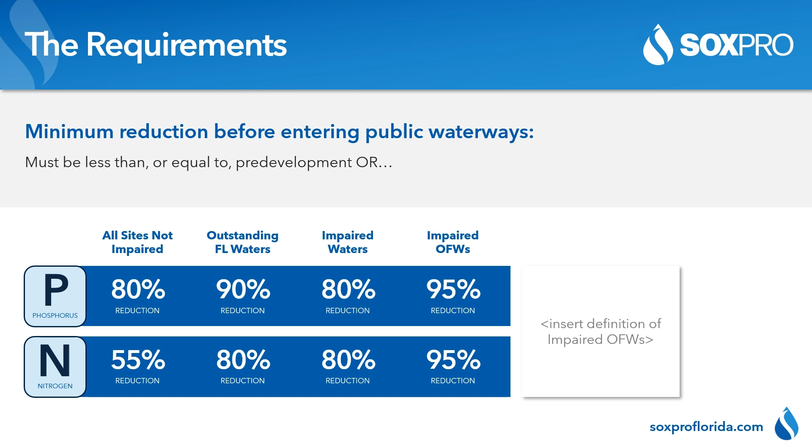The impact: the new rule forces all audiences to recognize environmental responsibility. For elected officials, while the new BMPs and bipartisan bill approval offer significant benefits, constituents may be unhappy about costs. Officials will need to balance environmental concerns with economic development.

Agency officials must ensure enforceability and compliance with requirements, develop remedy guidance for noncompliance, and effectively manage resources while addressing technical challenges.

Engineers must educate staff on new rules, develop multiple engineered choices and systems, and communicate plans to clients and permitting authorities.

Builders must collaborate with engineers on cost-effective solutions, assess and adjust practices and design standards, and address fines for non-compliance and permit issues.

A proactive partnership between erosion control and water quality. SOX Erosion Solutions develops, manufactures, and distributes a suite of environmentally focused, innovative, patented, bioengineered erosion control systems that immediately halt shoreline and hillside erosion.

Welcome to SOX Erosion Solutions, where we revolutionize environmental stewardship. At SOX, our mission is to stabilize, reduce contaminants, improve water quality, and expand green spaces. We deliver innovative and environmentally responsible solutions to counteract soil erosion.

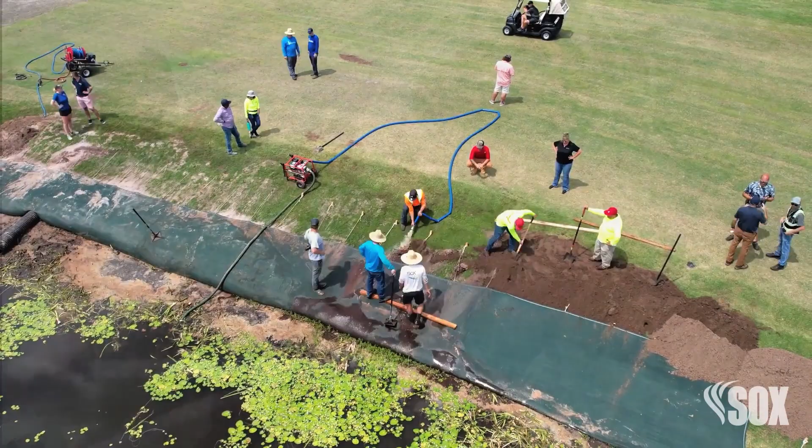Our team is dedicated to providing durable, high-value outcomes for our partners, stakeholders, and communities. We strike the perfect balance between economic growth and environmental preservation.

We work with a diverse range of clients, from local governments to private landowners, ensuring that our solutions meet the unique needs of each project.

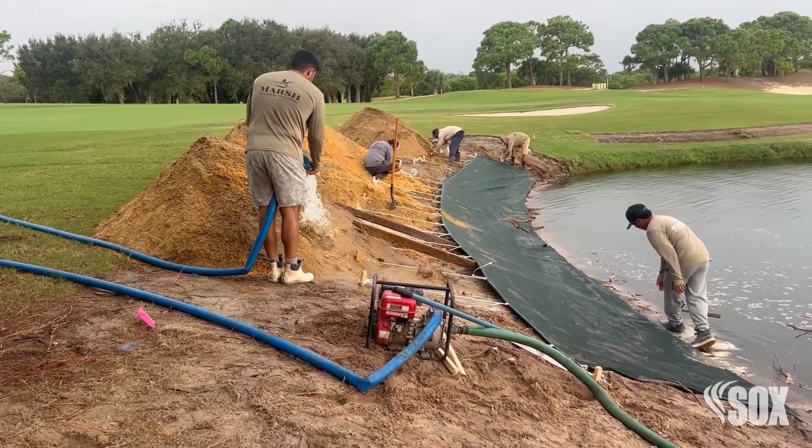SOX develops, manufactures, and distributes patented bioengineered erosion control systems that contour to any terrain. The systems are filled using locally sourced material or by dredging sediment from the adjacent water body, providing immediate stability and enhanced vegetation. Join us in making a transformative and enduring impact on our communities.

Together, we can create a sustainable future. SOX Erosion Solutions, leading the way in environmental stewardship.

SePRO Corporation is an environmental restoration company dedicated to protecting, preserving, and restoring nature. They provide water diagnostics and restoration technologies because everyone deserves clean, safe, and enjoyable water.

Most people enjoy the water for what it is: a place to boat, fish, and swim. A place to relax. A penalty stroke. A valuable resource for irrigation.

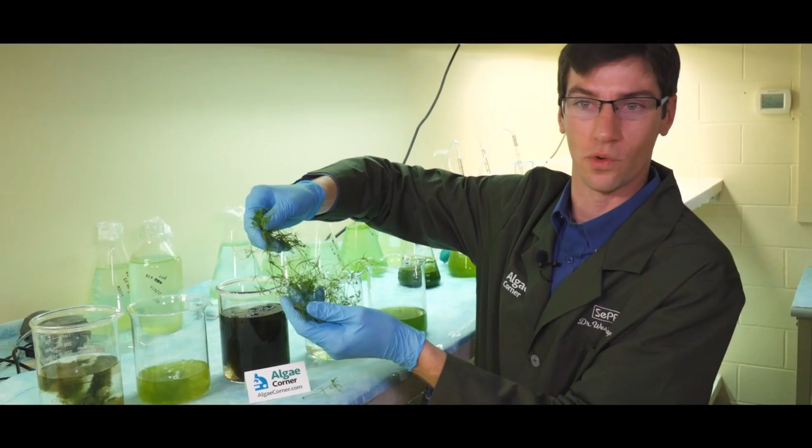But not all water is good water. As the aquatics industry leader, we embrace the most difficult challenges impacting water bodies today, developing solutions for the toughest, nastiest problems.

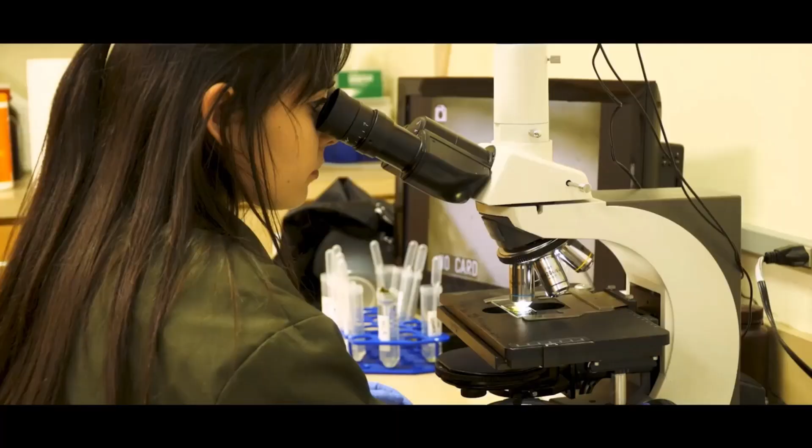Empowering professionals and homeowners to take charge, to restore natural beauty, and to prevent future issues. Through our research, we're finding new ways to fight the eyesores and health risks that plague water bodies around the world. And through our innovative technology, we're doing more with less.

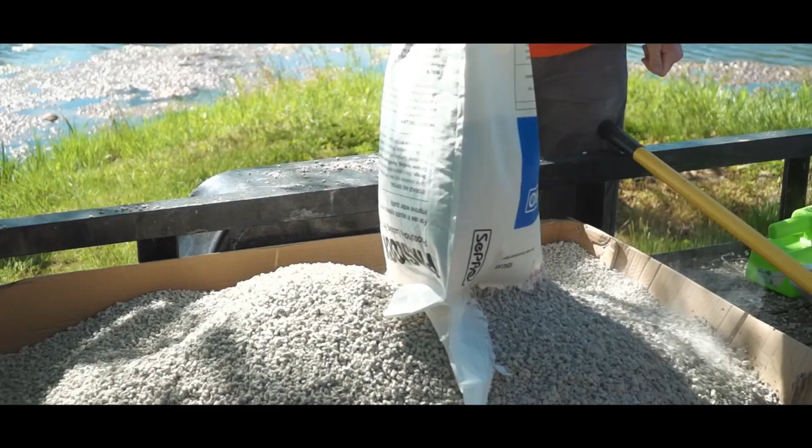We work to eliminate and prevent aquatic weeds that can be unsightly and hazardous, algae that can be toxic and noxious, and other water quality issues that can lead to future problems. At SePRO Corporation, we're committed to protecting, preserving, and restoring your water for the past 25 years and for generations to come.

SOX Erosion Solutions and SePRO Corporation have partnered to develop a new technology, SOXPRO, in anticipation of the new Florida Clean Waterways Act stormwater rule. SOXPRO is a 5-part system.

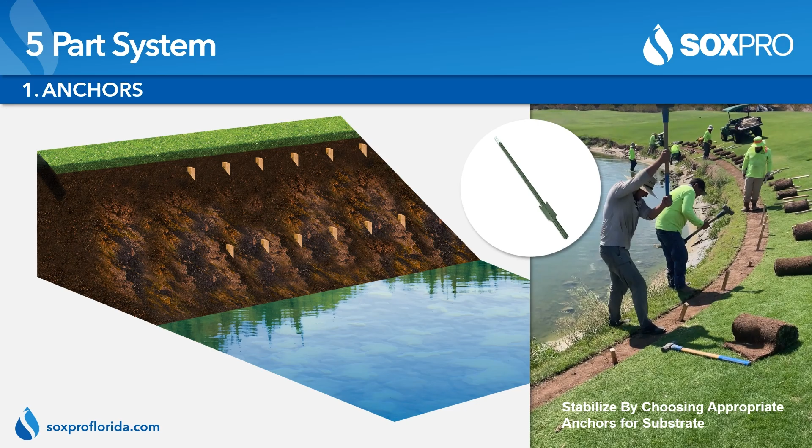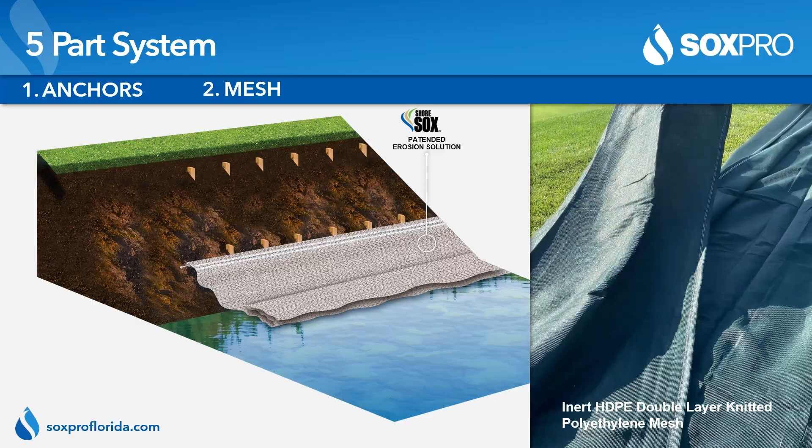Part 1: Anchors. Stabilize the system by choosing appropriate anchors for substrate. Part 2: Mesh. SOXPRO is manufactured with inert HDPE double-layered and knitted polyethylene mesh.

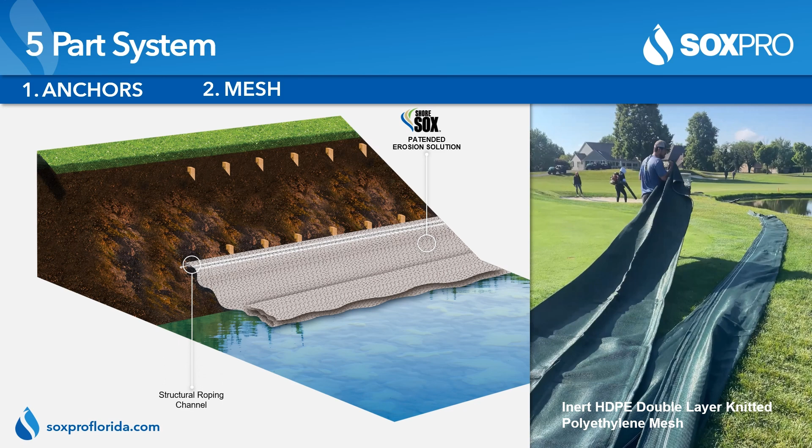The mesh is constructed with an integrated roping channel for structural support. Part 3: Tethering. SOXPRO is manufactured with inert HDPE double-layered and knitted polyethylene mesh. After the first row is secure, the mesh is folded for containment and then tethered to the top row.

Part 4: Fill. The system supports any organic fill material greater than 150 microns, such as crushed rock, coarse sand, mulch, compost, and dredge spoils. An active agent, scientifically formulated to bind phosphorus and nitrogen, is added to the fill material. The fill is compacted into the system by either washing it in or dredging it from the adjacent water body. Once filled, the system is immediately stabilized.

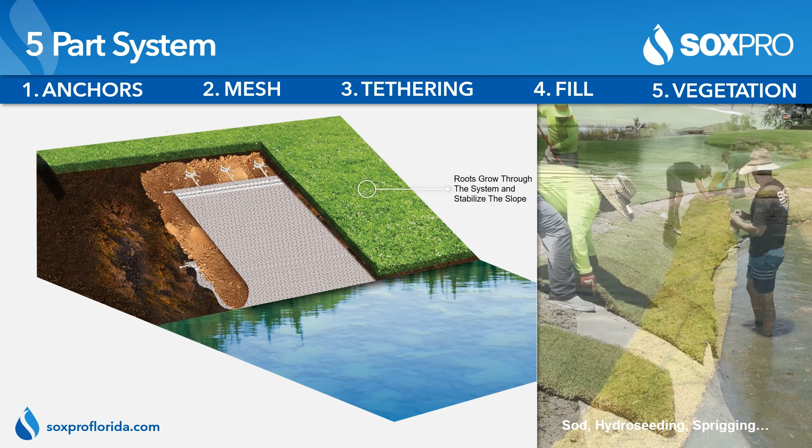Part 5: Vegetation. SOXPRO is vegetated with sod, hydroseeding, or sprigging. Roots grow directly through the mesh, further stabilizing the system.

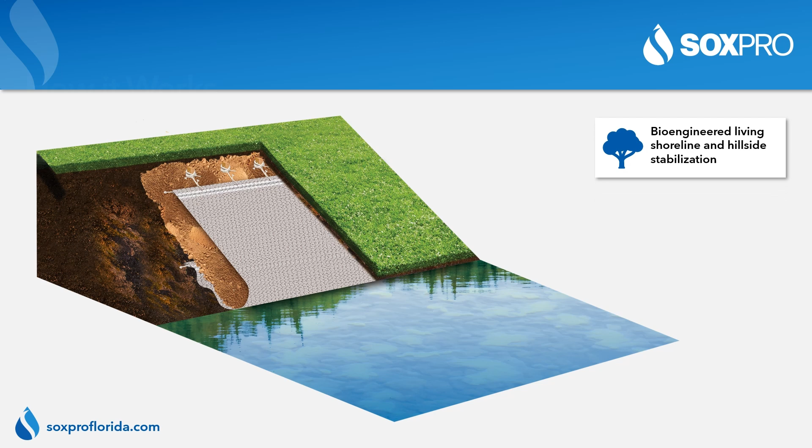Now that the shoreline has been stabilized, here's how the system works. When irrigation and stormwater hit the Earth's surface, it then penetrates the system. Here, the active agent binds phosphorus and nitrogen, which filters the runoff before it enters the waterway. This filtration results in improved water quality.

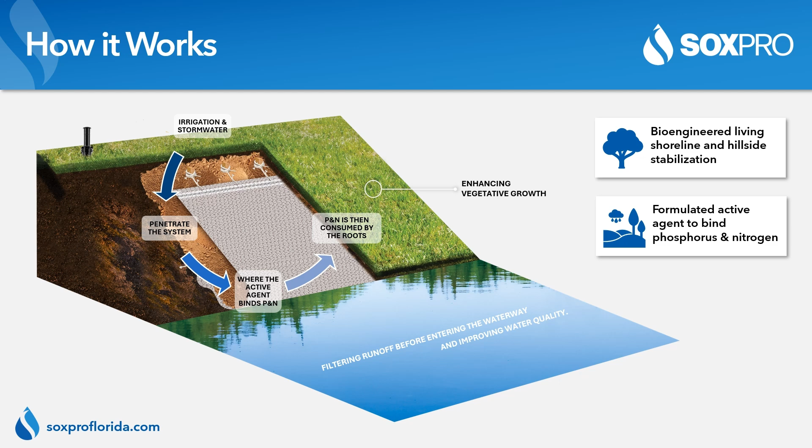The phosphorus and nitrogen that were bound to the active agent become nutritious food for the roots, which enhances vegetative growth. This process frees the active agent to then consume more phosphorus and nitrogen during the next water event, making SOXPRO a cyclical, regenerative system.

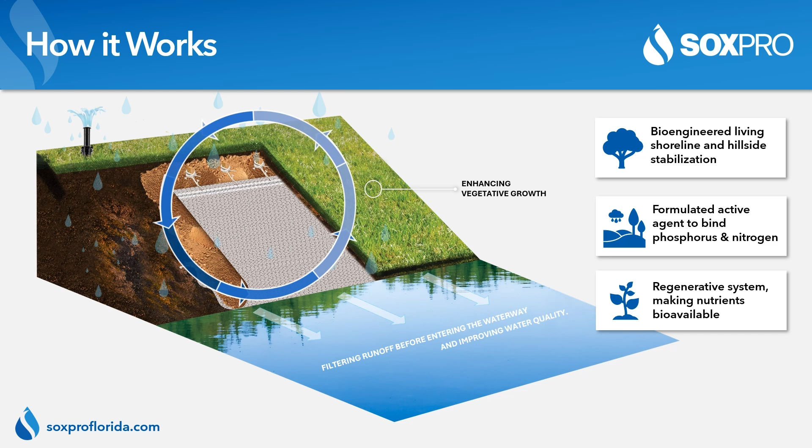Lab testing. SOXPRO underwent rigorous and controlled bench testing at SePRO's dedicated research campus in North Carolina, where testing was performed on both control and activation ponds. The control pond was untouched, while SOXPRO was installed on the activation pond. 25% of the activation pond received SOXPRO protection.

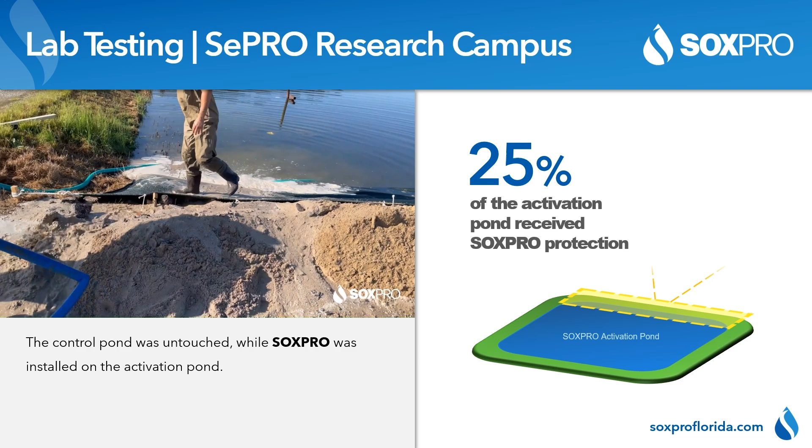After 120 days, the nitrogen load in the control pond increased by 33%, while decreasing by nearly 50% in the SOXPRO pond, a net reduction of 82%. The phosphorus load decreased by only 1.2% in the control pond, while decreasing 38% in the SOXPRO pond, a net reduction of 36.8%. 30 days later, SOXPRO showed even further net reduction at 84% in nitrogen and 53% in phosphorus.

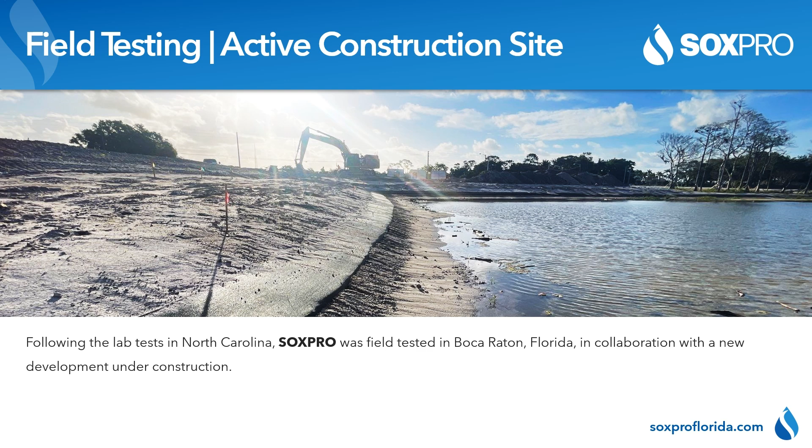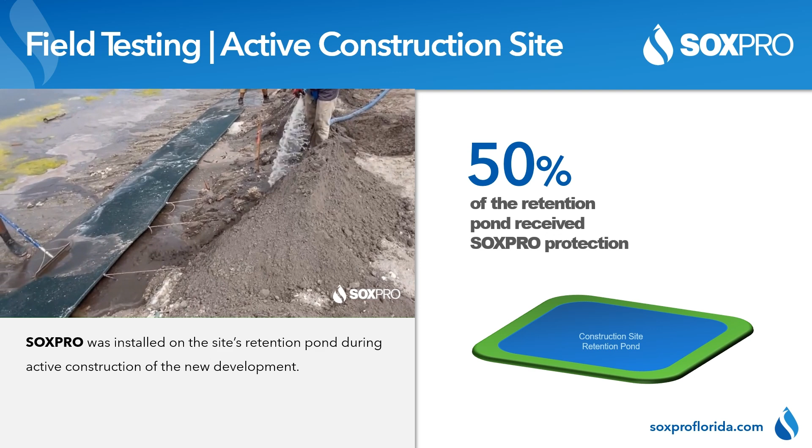Field testing. Following the lab testing in North Carolina, SOXPRO was field tested in Boca Raton, Florida, in collaboration with a new development under construction. SOXPRO was installed on the site's retention pond during active construction. 50% of the retention pond received SOXPRO protection.

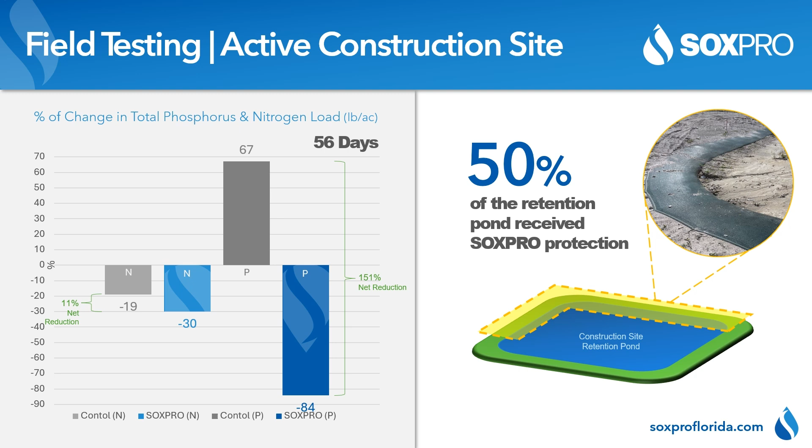After 28 days on an active construction site, the nitrogen load in the control had 0% change, while decreasing with SOXPRO for a net reduction of 14%. The phosphorus load had a net reduction of 79% with SOXPRO. At 56 days, SOXPRO showed a net reduction of 11% in nitrogen and 151% in phosphorus.

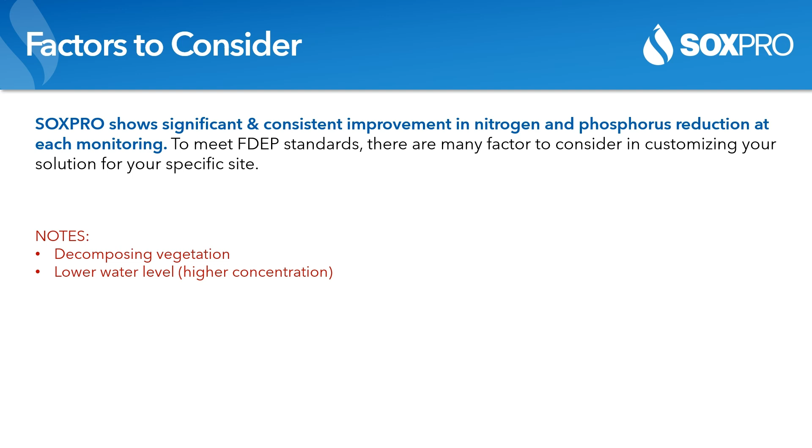Factors to consider. SOXPRO shows significant and consistent improvement in nitrogen and phosphorus reduction at each monitoring. To meet FDEP standards, there are many factors to consider in customizing your solution for your specific site.

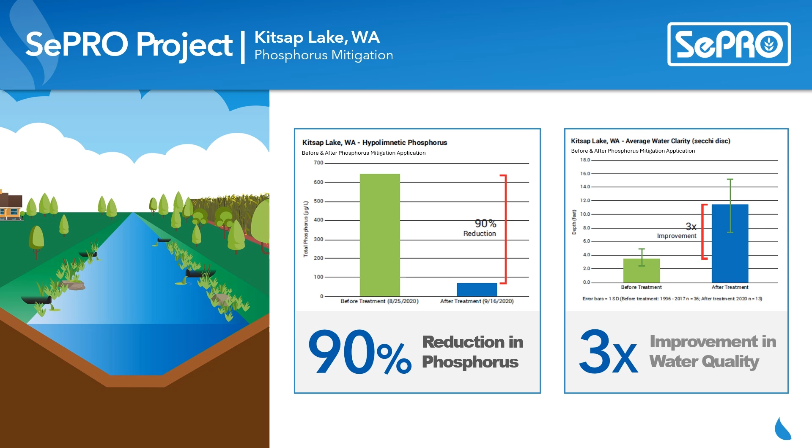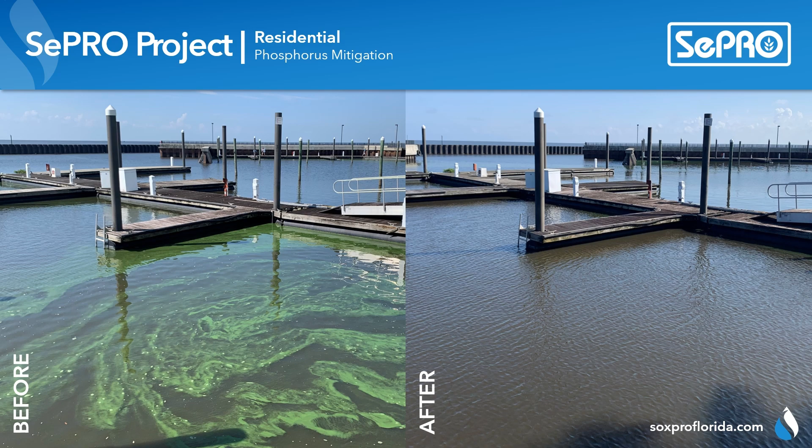In Kitsap Lake, Washington, SePRO mitigated phosphorus with a net reduction of 90% and 3 times improvement in water quality. Servicing these residential locations, SePRO's improvement in water quality is undeniable. SOXPRO improved water quality. Let's collaborate.

Like many areas, Florida's waters are challenged by polluted stormwater runoff and continuous shoreline erosion. This threatens the health of native wildlife, while also negatively impacting the local economy. Simultaneous reduction of erosion and pollution can happen.

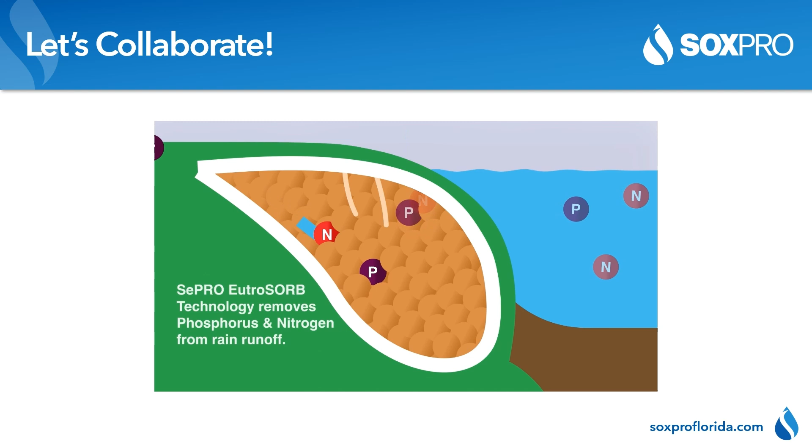Introducing SOXPRO's Water Health System, a dual-action system that prevents the degradation of shorelines and absorbs harmful nutrients before they reach the waterways. Using specialized materials and technology, communities can regain peace of mind when local agencies and developers collaborate and deploy sustainable solutions to maintain long-term compliance.

Healthy Florida waters can start today. Let's collaborate to create strong community partnerships, safeguard Florida's natural resources, and enhance its ecosystems.